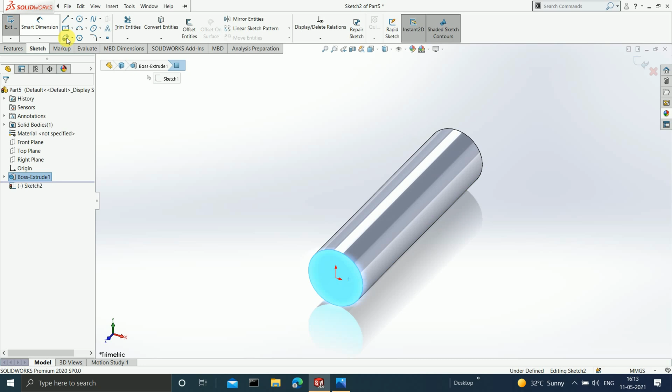Now guys, you have to select this particular plane, go to sketch and click on sketch. Press Ctrl 8 so that it becomes normal to your line of vision. And on this you are again going to sketch a circle, and give the dimension to the circle as 25 mm. This circle that we are going to extrude is for the ball bearings. Now click on OK. End your sketch.

Select the sketch, go to features and then click on extrude boss base. And you have to extrude this up to 7 mm. So enter 7 and then you can end your feature.

Now after this, again click on this, press Ctrl 8 and now we have to click on sketch and sketch a circle with a diameter of 30 mm. End your sketch, select the sketch, go to features and extrude it up to 3 mm. This you are going to make use as a stopper for the ball bearings.

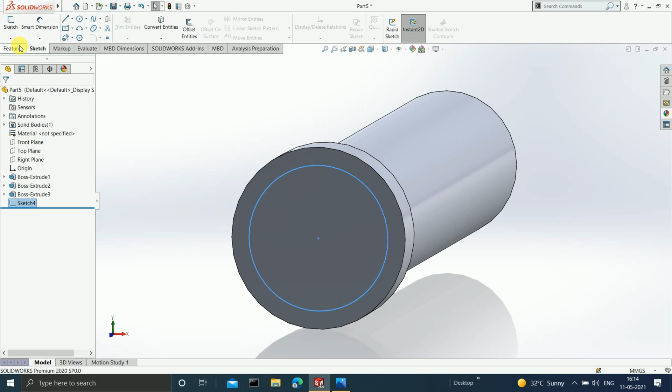Okay, now after this is done, select this, press Ctrl 8, go to sketch, click on sketch and sketch again a circle of 24 mm diameter. Do the dimension as 24 mm and you have to extrude it up to 29 mm. So select the sketch, go to features and click on extrude boss base and extrude it up to 29 mm. This is going to act as a clearance.

Select this again, press Ctrl 8, go to sketch, click on sketch and then draw a circle again on this. Here you have to draw a circle whose diameter is 28 mm. Once this is done, end your sketch. Then select the sketch, go to features, extrude it and extrude it up to 22 mm now. Click on OK. See, can you see your shaft is now getting ready.

Select this, press Ctrl 8. Now after this, click on sketch, again draw a circle and here you are going to draw a circle of 24 mm and extrude it up to 5 mm. Go to features, click on extrude boss base, enter 5 here and this again that you are extruding is for the clearance. This is for gear and this is for clearance.

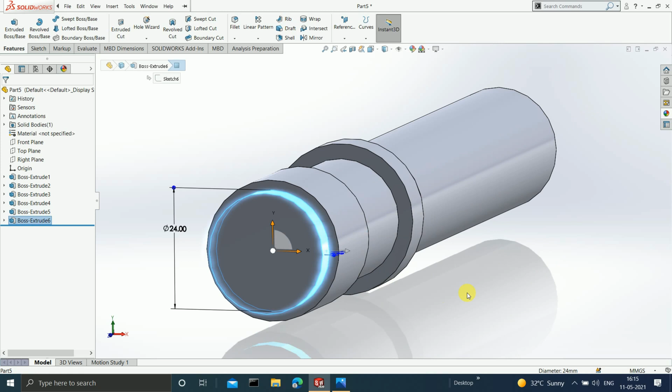Okay, now again select on this, go to sketch, click on sketch, press Ctrl 8 and here you are now going to sketch a circle of 30 mm diameter. And you have to simply extrude it up to 3 mm. Again this is going to act like a stopper for the bearing.

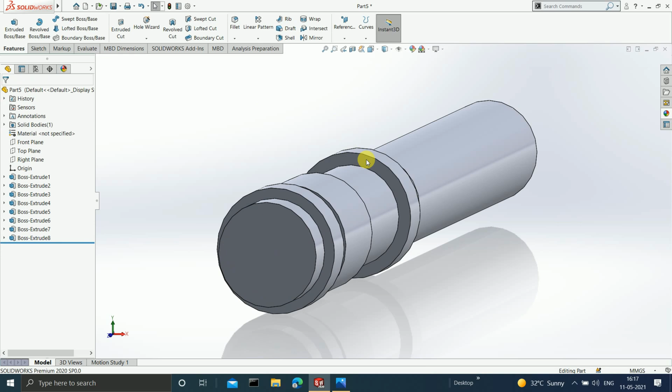Okay, now once this is done, now finally you have to sketch a last circle whose diameter is going to be 25 mm. Hit enter, then end your sketch and just select this sketch, go to features and then extrude it up to 7 mm. Now after this thing is done, then click on OK. So as you can see, your input shaft is now ready.

So you have to save this. I'll press Ctrl S, and in the desktop I have already created one folder for it and I'm going to save it by the name input shaft. Okay, and I'm going to save it. Now after my part is done, then I will close this.

Now we are going to design this input pinion, which you can see. Actually the input pinion is connected to the input shaft itself, but here we are going to design it separately, and then we will assemble it together. Now for designing a spur gear, you have two options: either you sketch it and then extrude it, or you have one simple option available, which I will show you now. Go to file, click on new, click on assembly, click on OK.

Okay guys, click cancel, and here in the design library you will find there is a toolbox present. Go to toolbox, then go to ANSI Metric. Here you have to select power transmission. In power transmission, go to gears, select the spur gear and drag it over here.

What you have to do now is just add the specifications here. We want the module to be 2, the number of teeth to be 18, the pressure angle to be 20, and the face width to be 22 mm.

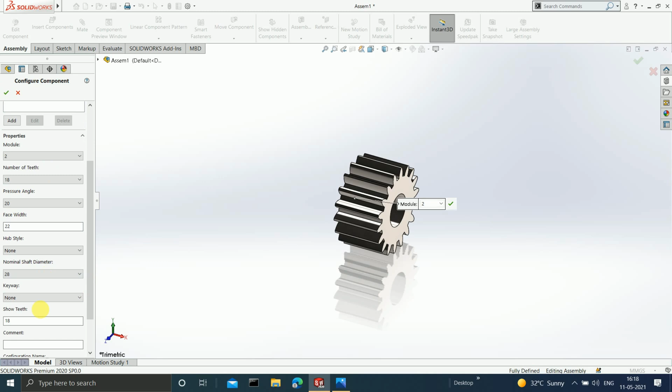There is no hub style required. The nominal shaft diameter should be 28. Once this is done, you can click on OK. You don't want one more, so you will click on cross. And this is how your input pinion is now ready.

After this, you just have to save it. Press Ctrl S, click on rebuild, and save the document. Here you have to save it as input pinion. After this, click on save.

Now once you are done with this, the next thing we are going to do is design this intershaft that is present over here. Actually there is a shaft going through here, you can only see one face of it. See this particular thing, so let's design that.

Let's close this. Go to file, click on new, then click on part, then click on OK. So now we are going to do fast. Click on front plane, click on sketch, draw one circle, do the dimensions to it as 25.

Then select your sketch, go to features, click on extrude boss base, and here extrude it up to 7 mm, and then click on OK.

Select this, press Ctrl 8, draw one circle of 30 mm. End your sketch. Select this particular sketch, go to features, then click on extrude boss base, extrude it up to 3 mm. Click on OK.

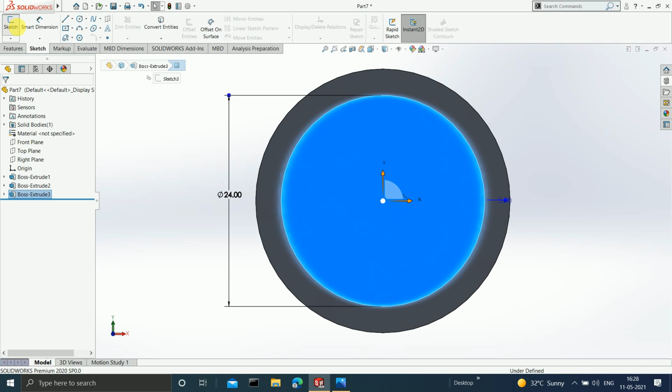Simply select this again, go to sketch, click on sketch, select a circle. Now you have to sketch a circle of 28 mm. End your sketch, select the sketch, go to features, go to extrude boss base, and you have to now extrude it up to 20 mm.

This we are extruding for a gear. See, so your intershaft is now getting ready. After this, you have to select this, press Ctrl 8, and again sketch a circle of 24 mm diameter.

Click on 24. Click on OK, and here you are now going to extrude it up to 5 mm. This is basically for the clearance, which you will understand when we do the assembly.

Select this, press Ctrl 8, and after this, now what you have to do is again click a sketch, and now sketch a circle with 28 mm diameter and extrude it up to 20 mm.

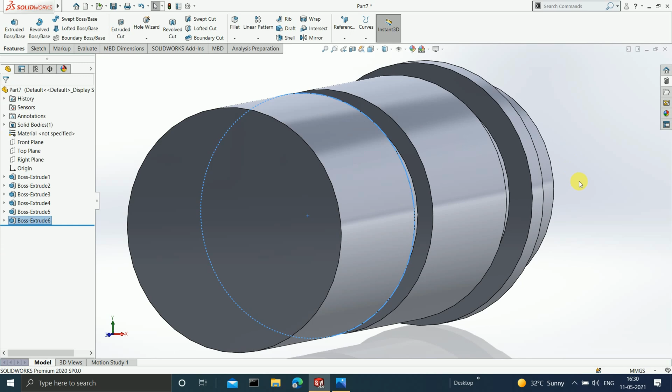Click on OK. Now again select this end surface, go to sketch and sketch a circle. Enter the dimensions here as 24. And sketch a circle, enter the dimensions of this as 24 mm.

Again end your sketch. Select the sketch, go to features, click on extrude boss base and enter the clearance value as 6 mm because you want to extrude up to 6 mm.

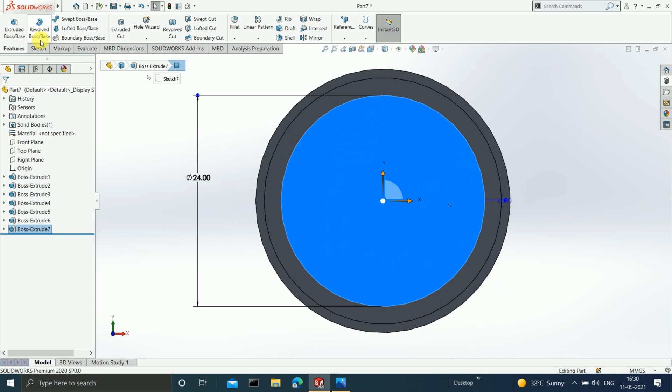Can you see? After this, select this, press Ctrl 8, go to sketch, click on sketch, sketch a circle. Now give the dimensions to the circle as 24 mm. End the sketch. Select the sketch, go to features, click on extrude boss base, and here you have to extrude it up to 3 mm.

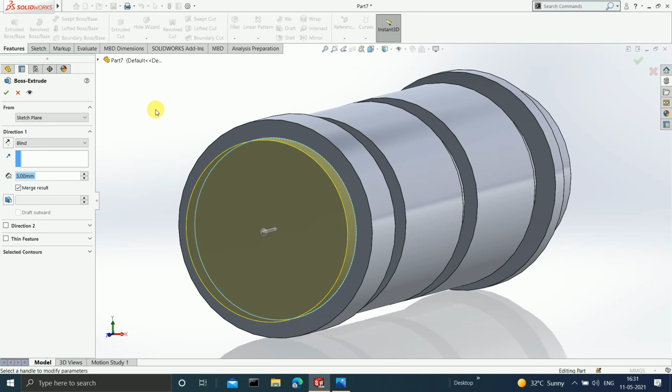After this, select this, press Ctrl 8, click on sketch, and sketch one more last circle of 25 mm diameter, with the smart dimensions as 25 mm, then extrude it up to 7 mm. And then click on OK.

So guys, in this way your intershaft is also now ready. You just have to save it now. Press Ctrl S, and I'm going to save it by the name intershaft.

Okay, now I'll end this sketch. Now the next thing we are going to do is design this particular gear, the golden gear which you can see here. This is what we are going to design now.

I'll go to file, click on new, go to assembly and click on OK. You know the procedure - first click on cancel, go to design library, and drag a spur gear. Once you drag the spur gear, it will ask you for the dimensions.

The module has to be same as the input pinion, so the module has to be 2. The number of teeth here I want is 49. The pressure angle I want is 20. The face width that I want is 20 mm. I don't want any hub style, and the nominal shaft diameter that I want is 28 mm - it's already 28. I'll now click on OK.

So guys, for reducing the weight of this gear, you can have some cuts. This is what we are going to do now. Select this, press Ctrl 8, and on this I am going to sketch.

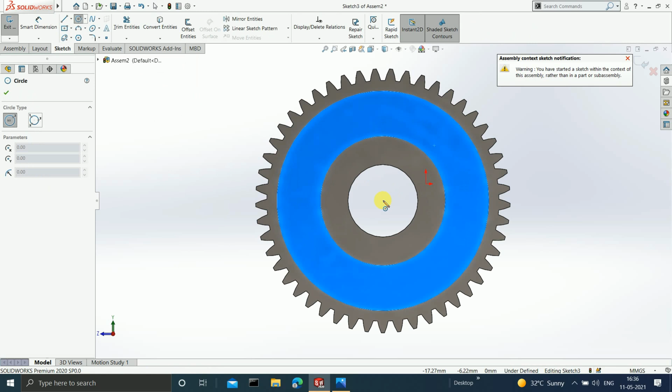After doing this cut on both sides, now we are going to cut holes on this. Click this particular thing, press Ctrl 8, click on sketch, and sketch one circle, click on escape. Select point and mark the center of this. Click on escape. Now make sure that this center and this point should always be vertical, so add the relation vertical here.

After this, give the dimensions to this particular circle as 14 mm, and its distance from the center as 25 plus 8.75, then click on OK.

Now after this, you have to select circular sketch pattern. It is asking us to select the parameters. Make sure that you deselect this, delete it, and select this as the point. Now it is asking how many instances - I want 10 such circles, so I'll enter 10. I'll click on OK and now exit my sketch.

After this, select your sketch, go to assembly, and you will find extruded cut. We are going to make a cut throughout, so I want through all both, and I'll click on OK. Now my gear 1 is ready. I'll save this, press Ctrl S, and save this by the name gear 1. I'll click on save. Now I am done with this, so I'll close it.

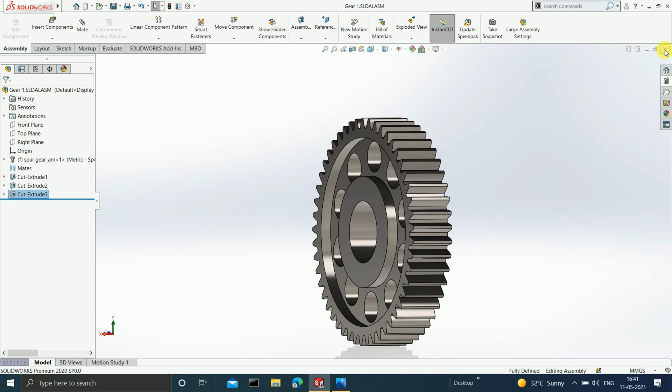The next thing we are going to design is this inter pinion. We have to follow the same procedure again - go to file, click on new, click on assembly, click on OK. Cancel everything, go to design library, and drag the spur gear.

Here you have to enter the data. The module now has to be 2.5. The number of teeth should be 19. The pressure angle has to be 20. The face width here has to be 20 itself. You don't want any hub style. And nominal shaft diameter in this particular case has to be 28. I click on 28 and click on OK.

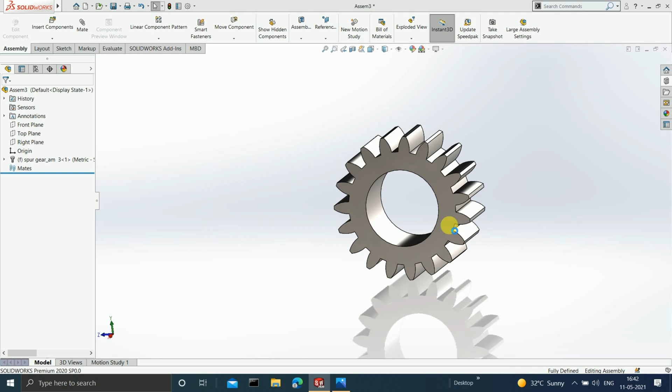I don't want one more, so I'll close this, and now I'm going to save this. Press Ctrl S, rebuild and save the document, and I'm going to save it by the name inter pinion. After this is done, click on save. Just close this.

Now guys, we are going to design this particular output shaft which is present over here. We don't want a shaft with tripod joint - here you can see there is a tripod joint present, but we don't want a tripod joint. It depends upon you which particular joint you want. Therefore we are going to design a shaft which is normal and not hollow. This is the output shaft that we are going to design now.

For designing the output shaft, I'll click on file, go to new, click on part, and click on OK. After this, I'll click on front plane, go to sketch, click on sketch, and draw one more circle with diameter of 65 mm, then extrude it up to 21 mm.

Now after this, select this, press Ctrl 8, sketch one more circle, and here the diameter should be 70, and you have to extrude it up to 3 mm.

Select the sketch, go to features and click on extrude, and extrude it up to 3 mm.

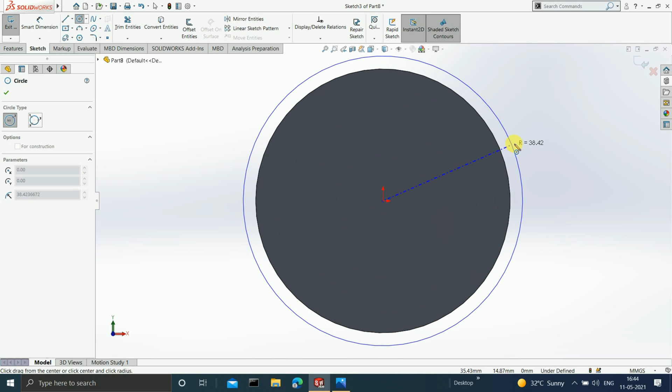Next select this, press Ctrl 8, and sketch one more circle, and this time its diameter has to be again 65. Select the sketch, go to features, and extrude it up to 31 mm.

After this is done, select this particular plane, press Ctrl 8, go to sketch, and draw one circle of 69 mm. Then extrude it up to 18 mm. Select this particular sketch, go to features, go to extrude boss base, and select it up to 18 mm.

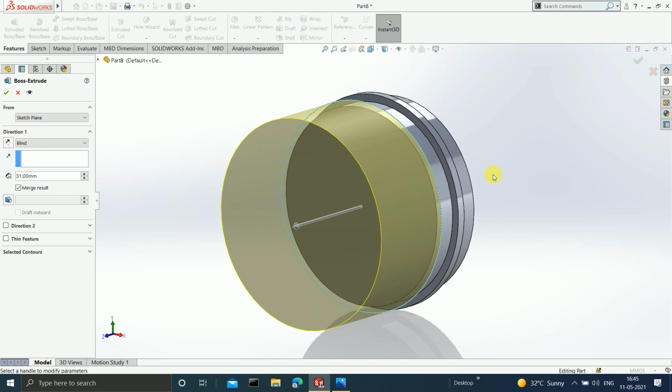Click on OK. After this, select this, again press Ctrl 8, click on sketch, and sketch a circle with a diameter of 65. Select your sketch, go to features, extrude this up to 5 mm.

Again select this, press Ctrl 8, sketch a circle of 70 mm diameter, and then extrude it up to 3 mm. Click on OK, select this, press Ctrl 8 and draw one circle of 65 mm diameter.

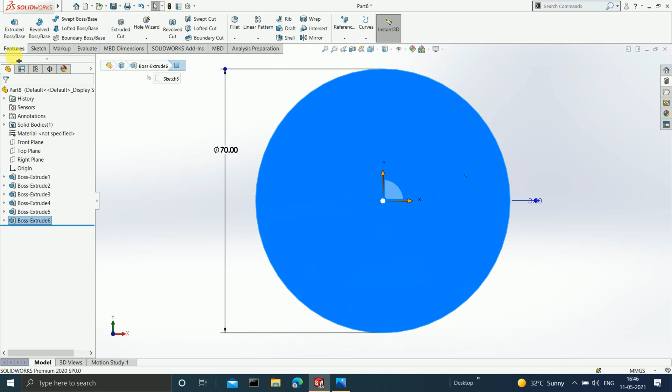Simply extrude it up to 23 mm. Select this particular sketch, go to the extrude boss base and enter the value as 23 here. After this is done, your output shaft is also ready. Just press Ctrl S and save this by the name output shaft. Once it's done, just click on save.

Now, just close this, and now we are going to design this particular gear, which is called the output gear. I'll click on file, click on new, click on assembly, and then click on OK. Cancel everything, go to design library, and just drag one spur gear.

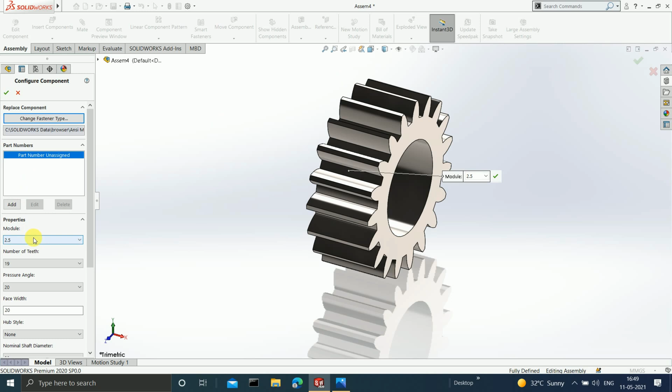Here it is going to ask you for some specifications. Enter the number of teeth as 49. The module has to be 2.5. The pressure angle has to be 20, and the face width has to be 18. Here the nominal shaft diameter has to be 69.

Currently it is not there, so we'll select 65. Click on OK. But we want a cut of 69 mm diameter, so I'll select this particular thing, press Ctrl 8, click on sketch, and sketch one circle of 69 mm diameter, properly from the center. Enter 69 here.

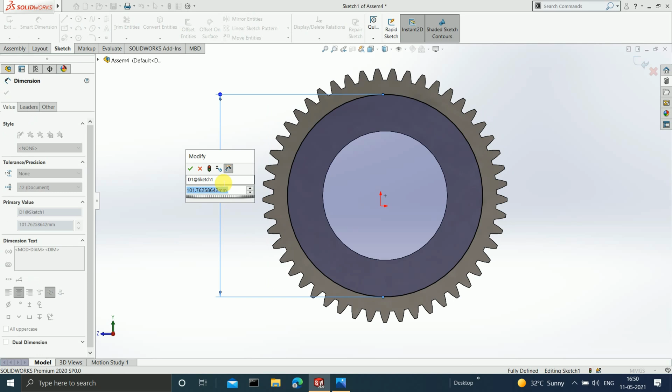After this is done, select the sketch, go to assembly. Here you will find an extruded cut, and we want through all both. Now again, to reduce the weight, it's upon you whether you want to cut it or not, but here we are going to obviously cut it.

Select this, press Ctrl 8, and I'm going to sketch on it. I'm going to sketch one circle first, the same procedure that we did for the earlier gear, then one more circle. Do the dimensions to this as 80, and do the dimensions to this outer circle as 107.

Then just end your sketch, select the sketch, go to assembly. Here you will find extruded cut. Extrude up to 3 mm, and then click on OK. So do the similar thing on this side as well.

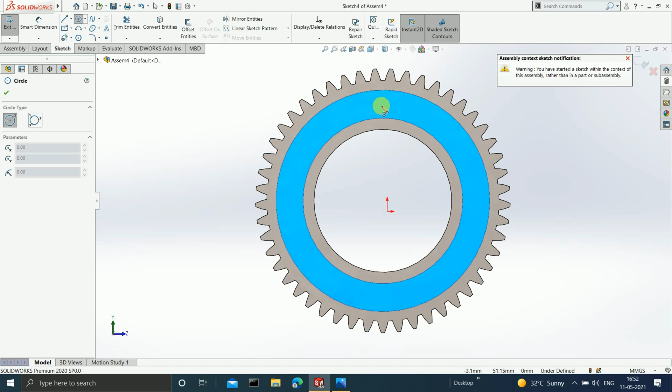Now after you are done on both sides, you have to cut some holes here. Select this, press Ctrl 8, click on sketch, sketch one circle, click on escape, select the point, mark it on the center, click on escape, select this particular point and click on vertical. After this, give the smart dimensions to the circle.

It has to be 10 mm, and its distance from the center 36.75. Now click on escape.

Go to circular pattern, select this thing, first delete this point and select the center as your point. Now you have to enter the instances over here. We want 20 such instances, and then click on OK.

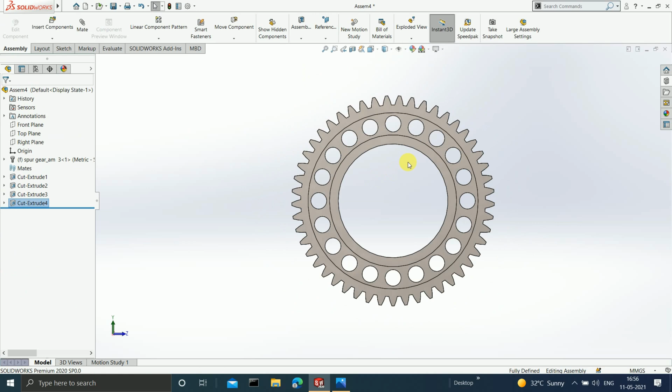Now simply end your sketch. After this, select the sketch, go to assembly. Here you will find extruded cut, and extrude, through all both. Click on OK. Now after this, your gear is ready.

Press Ctrl S, and here we are going to save it by the name output gear. Now after this is done, just click on save.

Now guys comes the most important part of designing the casing. I have some dimensions with me for this. So I click on file, click on new, click on part, and then click on OK.

First of all I'm going to click on front plane, and click on sketch. I'm going to sketch one circle here, and its diameter has to be 115.

Now draw one center line over here. It has to be horizontal. Click on escape. Draw one more center line. Click on escape, select this line, make it for infinite length and for construction.

After this, make sure that this is always coinciding with the origin. So select both of them and add an additional coincident. Now click on smart dimensions, select this, and enter the value as 50 here.

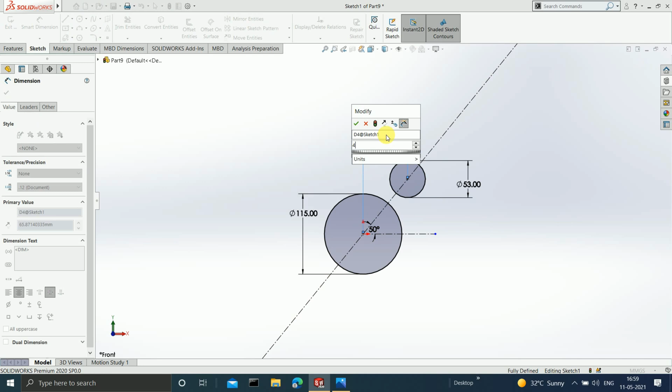Now just draw one more circle. Click on escape. Make sure that this point and this particular center both are horizontal. Now give the dimensions to this, and the diameter should be 53.

And the distance between the centers has to be 85 mm. Now just select the trim entities option, trim the inside part which is present here, and after you are done, click on OK.

Now guys, you obviously have to apply some fillets over here, so I'll select sketch fillet. In the items to fillet, I'm going to select this point, this point, this particular point, and this point, and enter the value as 15 here. After this is done, click on OK.

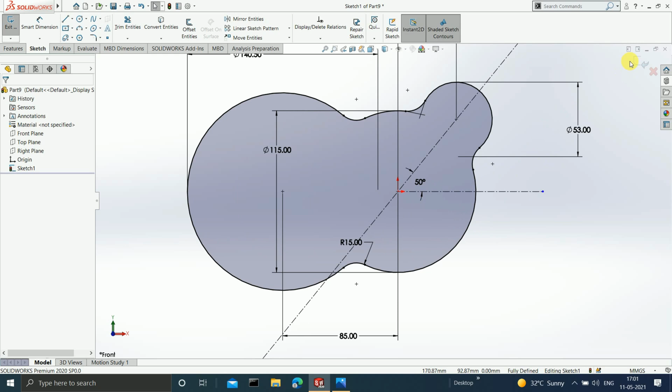Now the next job is to simply extrude it up to 35 mm. So I'll end my sketch, select the sketch, go to features, and extrude it up to 35 mm. After this is done, click on OK.

Now the next thing you have to do is apply a shell feature. So I'll click on shell feature, and here I'm going to select this particular face, and I want the thickness of 4 mm. So I'll click on OK.

Now once you are done with this, select this particular face, press Ctrl 8, sketch on it. Select the centers of each circle. See, here is the center. Similarly for this bigger circle as well.

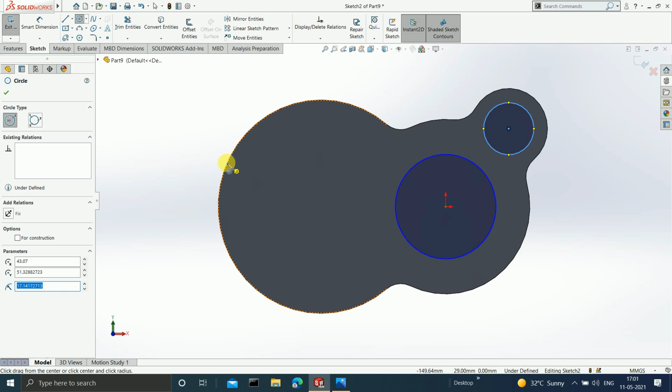And now guys, give the dimensions. Here it should be 37. Here also it should be 37 mm. And in this case it has to be 85 mm. After this is done, just end your sketch.

Now select this particular sketch, go to features, click on extruded cut, and extrude through and cut through all.

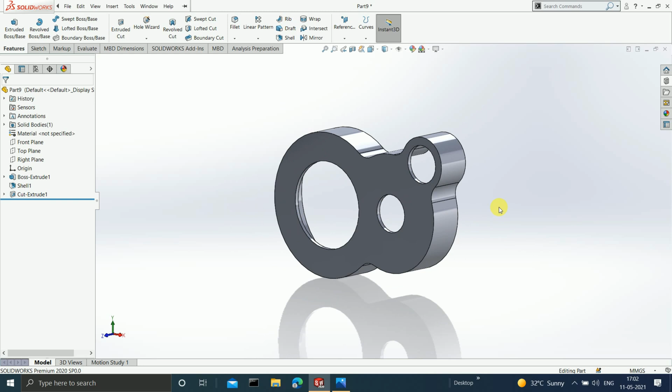Now once you are done with this, again press Ctrl 8, click on sketch. I am going to sketch one circle here, and click on escape. Give the dimensions to this, it obviously has to be 37.

Now click on offset entities, select this particular thing and offset by 2 mm. Once this is done, click on OK, end your sketch. Select the sketch, go to features and click on extruded boss base, and extrude up to 3 mm.

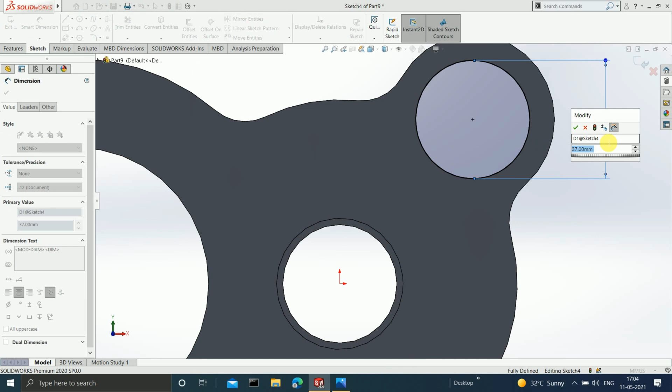Now after this, do the same thing again. Click on escape. Give the dimensions here as 37. Click on offset entities, select this and offset by 2 mm. After you are done with this, click on OK.

Select this particular sketch, go to features, and click on extruded boss base. In this extruded boss base, you have to extrude it up to 3 mm.

Now once this is done, you have to do the same procedure for this particular bigger circle as well. Press Ctrl 8, click on sketch, give the smart dimensions to this, it has to be 85. Just select offset entities, select this particular thing and then click on OK.

Now once you're done with this, end your sketch, then select the sketch, go to features and click on extrude boss base, and extrude it up to 5 mm.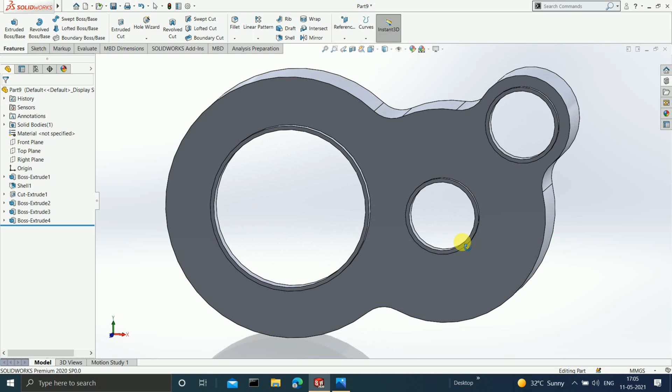Now guys, you have to cover this middle circle, so I'll select this particular face, press Ctrl 8, and sketch on it. I'll end my sketch. I'll select this particular sketch, go to features, click on extrude boss base, and extrude it by just 2 mm.

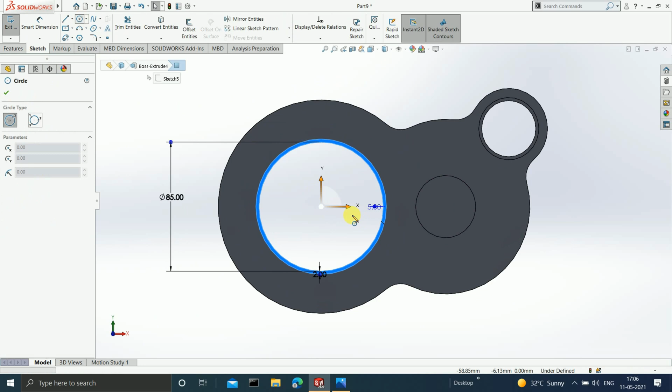After this thing is done, now for this particular output thing, we don't have to cover it completely. So I'll click on sketch, select this origin, draw one more circle from the center, and guys, here you have to give the smart dimensions to this as 66 mm.

Okay, and this has to be 85. Just select this particular sketch, go to features, and then click on extruded boss base. Here I have extruded up to 2 mm, and then I'll click on OK.

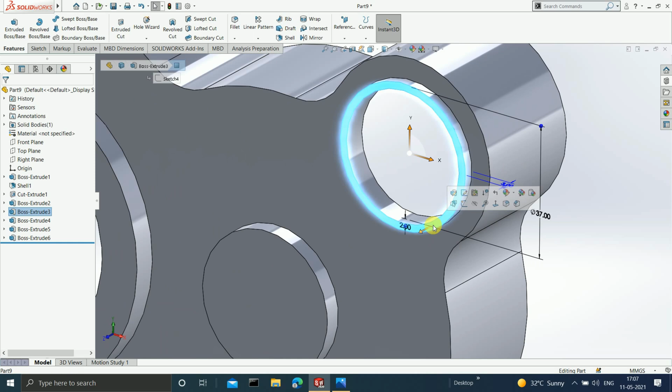Okay, fine with this. Now the next thing that you have to do, press Ctrl 8, click on sketch, and sketch on it. Select the center, click on escape, draw one more circle, and the dimensions of this should be 26 mm.

And the bigger circle has to be automatically default. I'll end the sketch, select the sketch here, go to features, and I'm going to click on extruded boss base. Here I'm going to extrude to 2 mm and then click on OK.

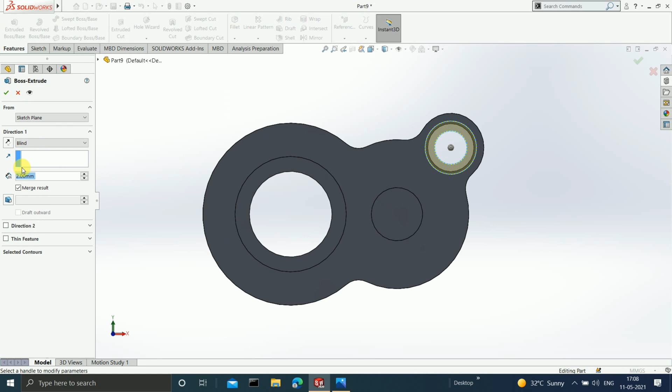So guys, our casing is almost ready over here. If you want, you can obviously apply some fillets, but before that we have to do one more thing over here. Press Ctrl 8 and then click on sketch.

Now click on offset entities and you have to offset it by 5 mm. Click on OK. Now guys, click on offset entities again, select this particular sketch.

Select the whole outside edge over here. Enter 5 here, and now this time you have to click on reverse, and then click on OK. Now just end your sketch.

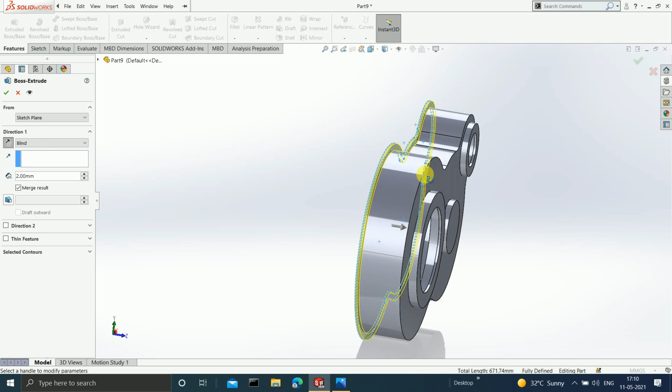Select this particular sketch, go to features, and you are now going to click on extrude boss base. Change the direction from here, and you can obviously enter the value as 3 mm. After this thing is done, just simply click on OK.

So guys, your casing is almost ready now. If you want, you can obviously apply some fillets over here. So how to apply the fillets, that you must be knowing. You just have to simply go to fillets and select the edge.

For example, I am selecting this particular edge here, and see, a fillet is getting applied. You have to enter the value, for example 3 mm, and then your fillet will automatically get applied. Can you see? Similarly, you can apply wherever you want.

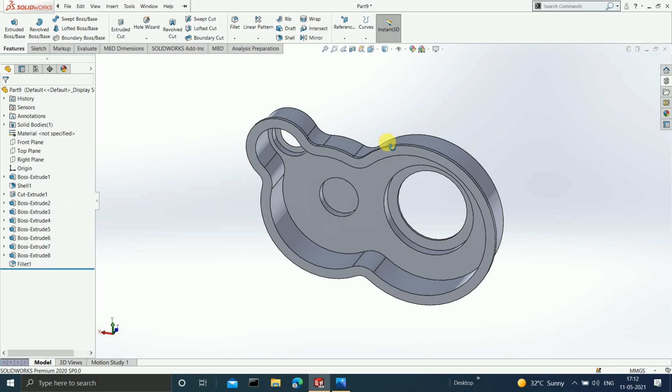So guys, as you can observe over here, I have applied some fillets over here. Now the next thing that you have to do, you have to obviously do something to the joint.

So we have to do this particular sketch over here now. First of all, we have to draw a vertical line. Click on escape, select this particular line, click on infinite length, and then click on OK. After this is done, select this particular line and make it fix.

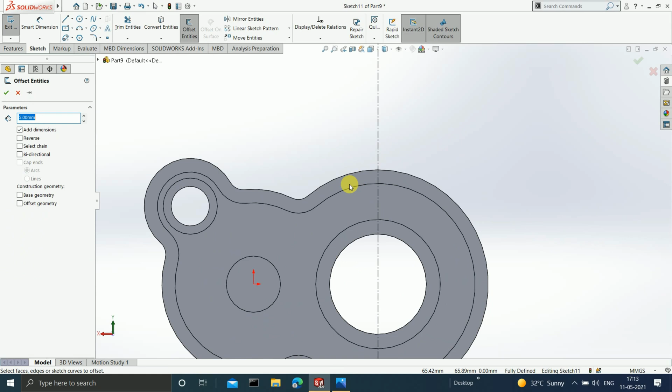Now the next job that you have to do, just refer to the figure. You have to click on offset entities, select this particular thing, and offset by 0 mm. You could have done this using convert entities as well, no issue.

Now here you can see that there are two vertical lines which are 4 mm apart on both sides of the center line. So let's draw that. Click on escape.

So now guys, give the dimensions to this. From this particular thing to here, it has to be 4 mm. From here, again it has to be 4 mm.

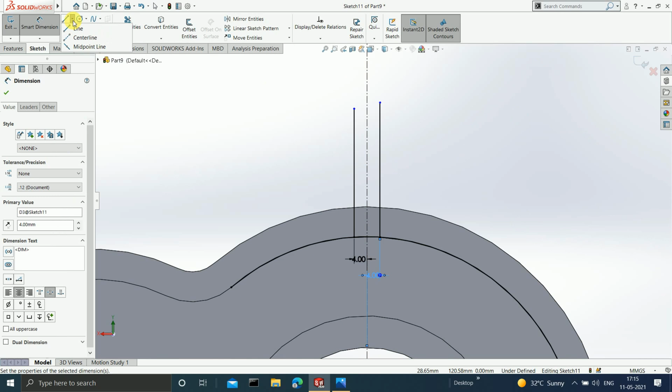The next thing that is done over here, we have drawn one tangent, horizontal tangent over here. So let's draw that horizontal tangent as well. Click on escape. Select this, select the circle, and make it tangent.

Okay, now give the smart dimensions from this particular point till here, and it has to be 3 mm. Again from here, it has to be 3 mm.

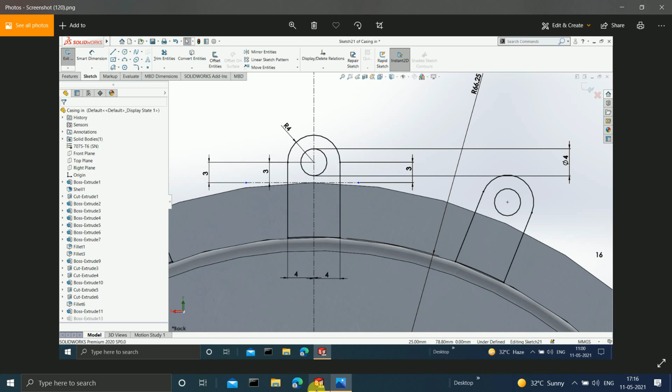Now the next thing that you have to do is just to simply draw a 3-point arc. Click on escape. After this, on the same point, draw one circle of radius 4 mm. So I have drawn one circle of diameter 4 mm as well.

Now after this, select trim entities, trim this unwanted part, and then click on OK.

Now you want the same thing on this particular circle, so I'll obviously click on circular sketch pattern, and here it is asking me to select the parameters, so I'm selecting this. Instead of this particular point, I'll delete this point. I want it from here. And you have to adjust the number of instances, obviously.

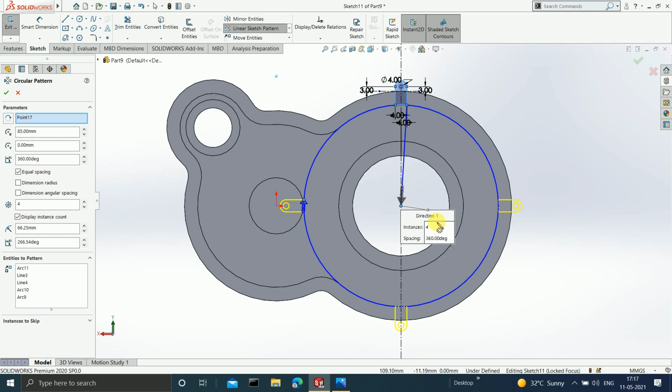Enter the number of instances as 20 here. And we obviously have to skip these particular instances, so I'll click on instances to skip. I'm going to select this particular instance, this one. Okay, and now it is fine, so I'll click on OK.

Now I will end the sketch. Select the sketch, go to features, click on extrude boss base. Extrude in the opposite direction and extrude up to, let's say, 5 mm.

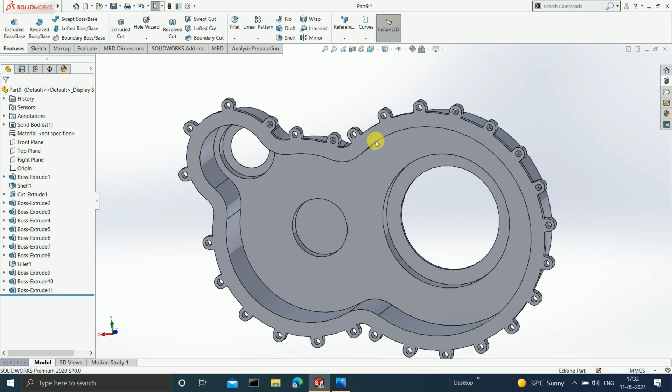Click on OK. You want to do the same thing over here as well, which you can do easily. In this way, I've done this on the complete edge, and now the casing is ready. You can apply fillets if you want, and even apply a rib feature to give it support. I'll save this casing by pressing Ctrl+S, save it by the name casing, and click save.

Now it's the important time for us to assemble all the things that we have done. I'll click on file, click on new, click on assembly, then click on OK. Just cancel everything. The first thing we are going to do is assemble this input gear and this golden gear that you can see.

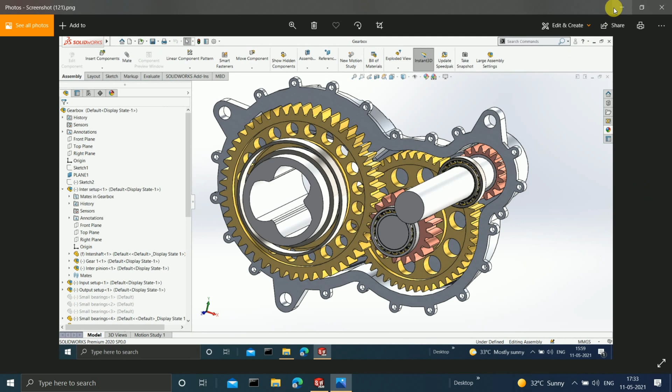Select the front plane, press Ctrl+8, click on sketch, sketch one circle, click escape, give the dimension as 49 into 2. After this, sketch one horizontal center line, click escape, sketch one center line at an angle of 50 degrees, click escape, select this, make it infinite length.

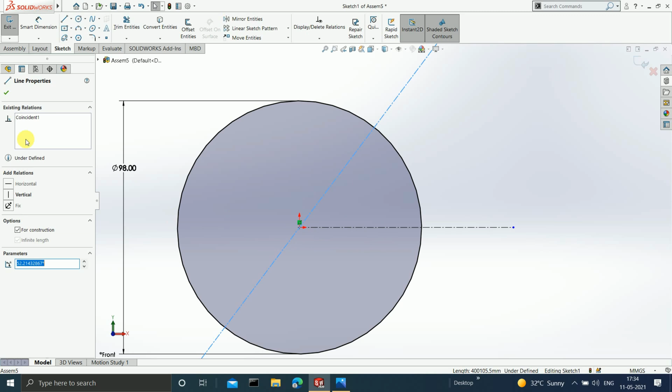Now make sure that this is always coinciding. Give the smart dimension as 50 degrees. After this, click one more circle, click smart dimension, give the dimension as 36, click escape. Now the distance between these two has to be 43.07. Now you can end your sketch.

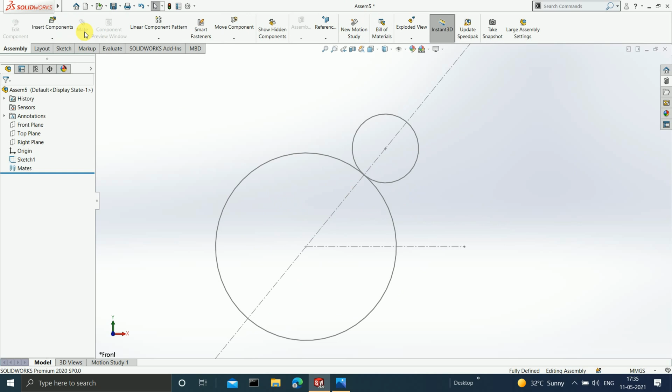Now you have to insert the components, so I am going to insert the input gear. Rebuild the document. Right click on it and make it float.

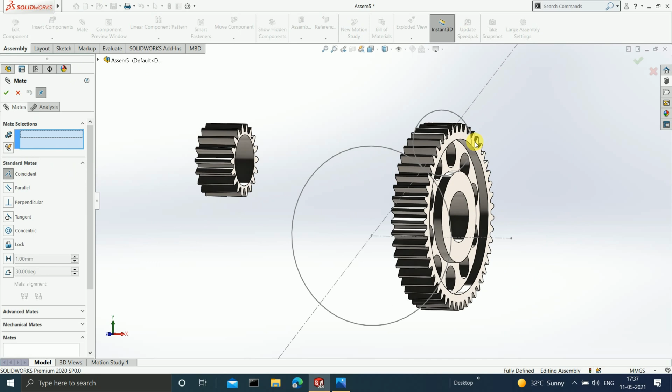Now you have to insert one more thing. Click on insert components, insert gear 1. Now after this is done, make sure you apply a coincident mate between this particular face of gear 1 and the front plane. This is fine, then click OK.

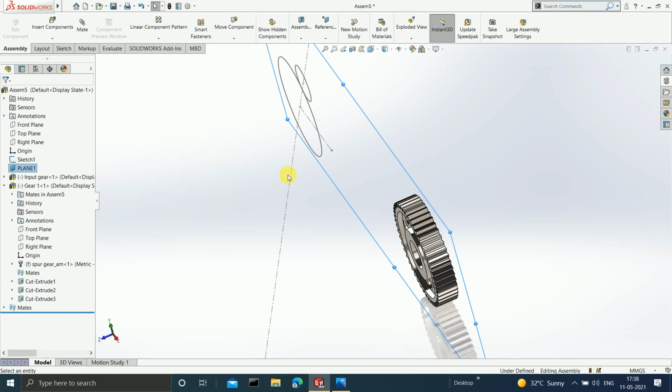Now you have to insert one more plane. Insert reference geometry, click on plane, and this plane has to be at a distance of 1mm from the front plane. Reverse the direction and click OK. Now once you've inserted this plane, the next thing is to apply a mate between this face of the gear and plane 1. Change the mate orientation or alignment and click OK.

Now you want this circle and this circle to be concentric, so I'll click on concentric, select this and select this particular thing, click OK. Now you want this edge and this circle to be concentric, so I'll click OK. After this is done, I'll click OK. Now can you see that the gears are properly meshing with each other?

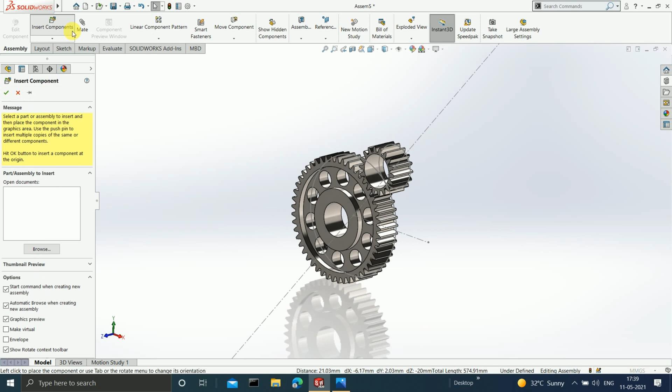Now you have to add the input shaft. So I'll insert components, and I'm going to insert the input shaft.

I will select this plane and select this, and you can see it has now gone into its place. Now the next thing you have to do, I want this plane to coincide with this one. I click OK, and now you can see the shaft has taken its position properly. Just simply click OK, and now it's time for us to insert the inter shaft as well.

I'll click insert components, and here I'm going to click on inter shaft. I'll click open.

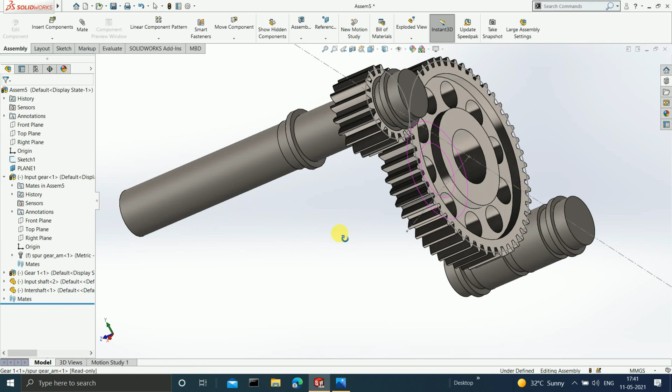Now the next thing you have to do is apply a mate between this particular surface and this surface. Can you see a concentric mate has been applied? Now once this is done, you want this particular face to coincide with this, so I'll select this, and a coincident mate is applied. So it is as easy as that. I hope it is easy.

Now here there will be one more gear at this particular position, so I have to insert components now. I'll click on insert components, and I'm going to insert the inter pinion. Click rebuild. Make sure that it is float. Yeah, it is float.

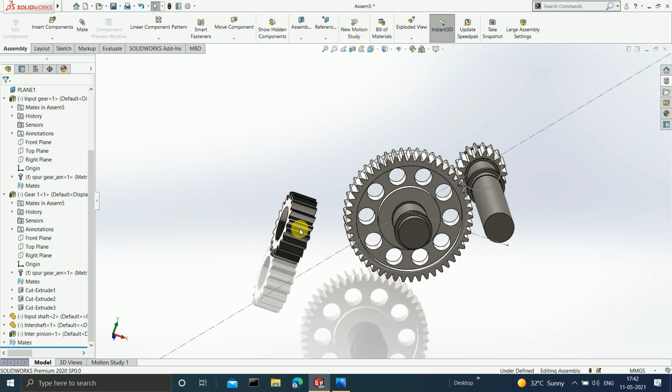Now obviously you want this particular surface to be concentric with this one, so I'll click on mate. I'll select this surface and this surface and make them concentric. Now make sure that this surface of the gear is always coincident with this particular surface. Click OK.

Now after this is done, let us apply the mesh. Let us mesh this particular pinion with the output gear. So for that, I am going to click on this and press Ctrl 8.

I am going to sketch on it. I'll sketch one circle, click on escape. Make sure that this is always horizontal with the origin. Now give the dimensions to this as 49 into 2.5, because 49 is the number of teeth and 2.5 is the module. After this is done, click on escape.

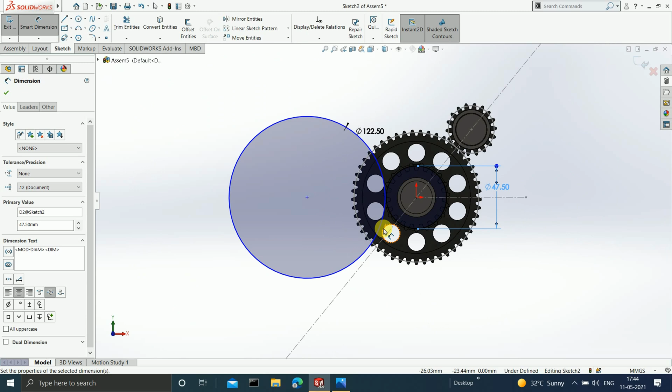Now draw one more circle, click on escape, enter the dimensions of this as 19 into 2.5. Now click on escape and make sure that both the circles are tangential. Select both the circles and make them tangent, and click OK. Now you can end your sketch, and now you have to insert one more plane.

Assembly, go to reference, insert, go to reference geometry, go to plane, and here you have to insert the first reference as this particular face and enter distance as 1 mm, and you want it on the opposite direction. So I'll click on flip offset and click OK.

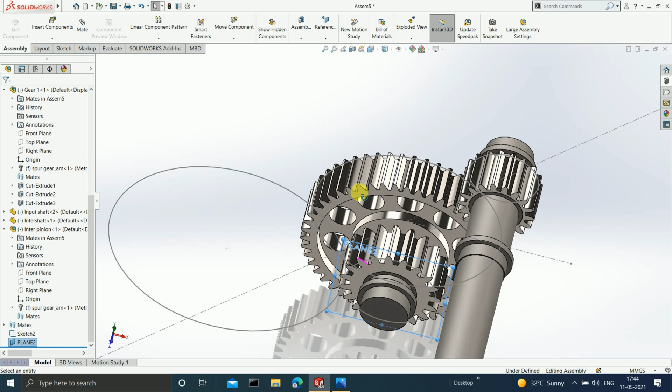Now once this plane is ready, we have to insert the output gear. Here you can find the output gear, I'll click on open. Now once this is done, click on mate. You have to apply a mate between this particular plane face and plane 2. Click on mate alignment and then click OK.

Now make sure that this particular circle is always concentric with this one. Now you can observe that the gears are properly meshing with each other. Now it is going to be very simple for us.

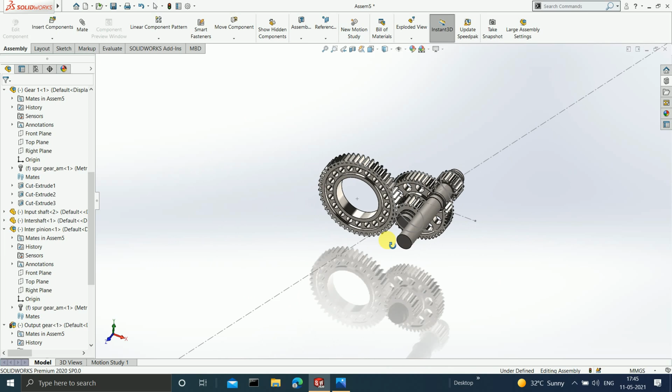You just have to insert the output shaft now. So I'll insert the output shaft. Here is my output shaft. Now what you have to do next is that you want your gear to fit exactly on this particular surface. So I click on mate, I'll select this and I'll select this, and then click OK.

Now once this is done, you can click OK, and your assembly is almost ready. The important difficult part is done. Now you just have to insert the ball bearings.

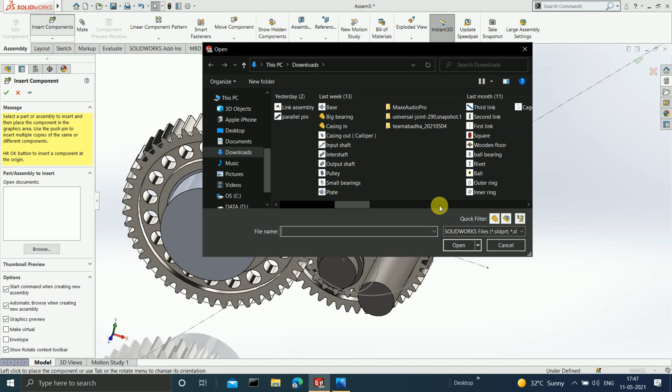I'll click on insert components, and here you can find out the ball bearing present. So I'll click on open. You might be thinking that I have not shown how I did the ball bearing. Let me tell you that I have already uploaded a video on how to make a ball bearing, as it is itself an assembly, so you can find the link of that video in the description box below, or you can simply click on the I button present on the right top corner of your screen.

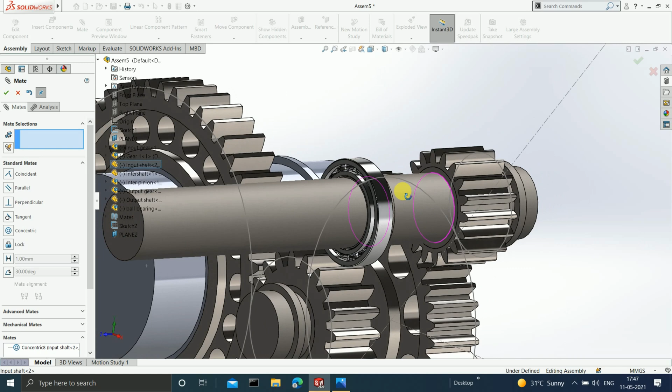Now once this is done, you want this bearing to fit over here. So I'll click on mate, I'll select this particular surface, I'll select this, and a concentric mate is now applied. Now after this, you have to apply a coincident mate between this particular surface and this surface, and then click OK.

Similarly, you have to insert one ball bearing over here as well. So I'll insert components, and I'm going to insert the ball bearing. The same procedure you have to follow. As you can see, I properly fit the ball bearing and applied the mates over here. You have to insert the ball bearings at this particular position and at this position as well, so let's do that.

Now you can see I have inserted the ball bearing at this particular position. One over here and one here. Now you want some big ball bearings on these particular positions as well, so let us insert the different ball bearings now.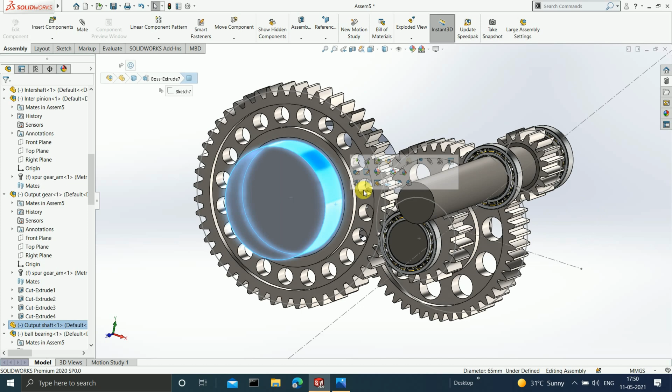So I have entered a big bearing. I have not done a detailing of this particular bearing, but you can obviously pause the video and do detailing for this particular bearing as well. Apply the mates over here and then click OK.

Now apply a mate in which you have to make this particular face and this face coincident, and then click OK. Similarly, apply one bearing on this particular side as well. So insert components, the big bearings.

So guys, now the assembly is ready. Now it is time for us to insert the casing. That is going to be very easy. I'll insert component. Here you can find the casing present. Open it.

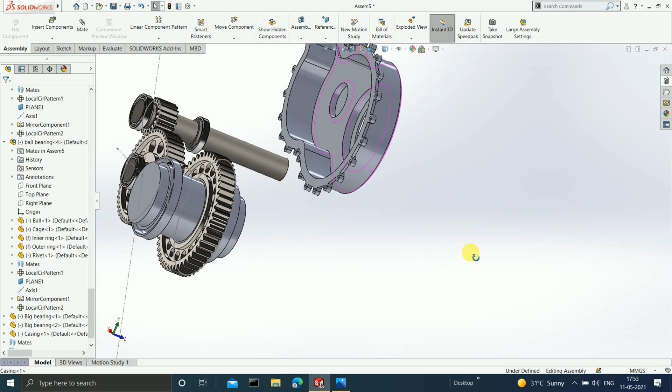Now guys, make sure that this particular plane is coinciding with this particular plane, and then click on OK. Now you want this particular edge to be concentric with this one. So concentric mate is applied. Click on OK.

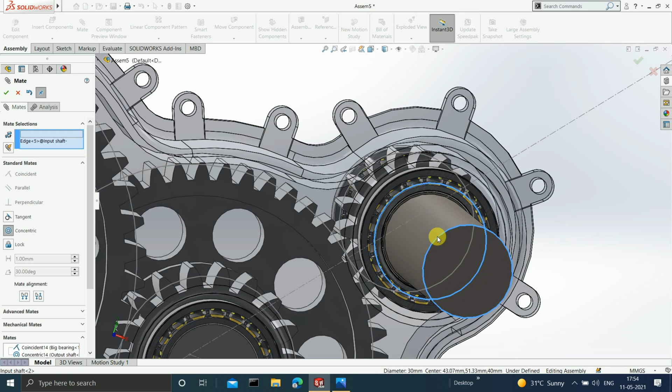If you want, you can even apply one more concentric mate between this and this, so that now it is going to remain fixed. Now I'll click on OK.

And guys, you want a casing on the other side as well, so it is now simple. What you can do here is click on mirror components. In this, you have to select the mirror plane as this particular plane, and the components to mirror is obviously this particular casing itself, and then click on OK.

And then click on OK, and see a casing has appeared over here.

And as your gearbox is now ready, now it is upon you whether you want to apply some different looks for it. If you want, then you can do it.

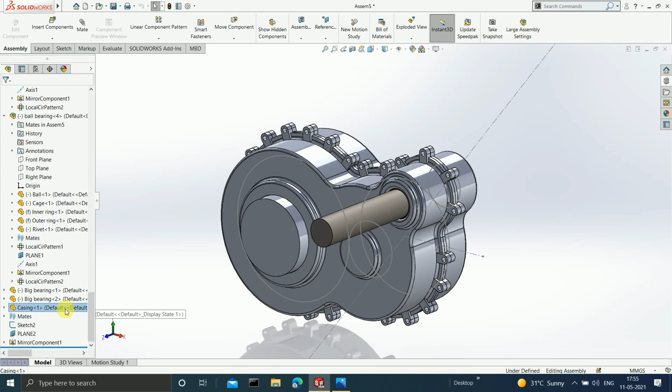If you want to observe what's inside, then you can select this particular casing - this is casing number 1 - and right click on it, and you can hide the component. Okay, and you can observe what's inside.

So guys, now let us impart some aesthetic look to the gearbox. For this, I am going to select the shafts. I am going to select the input shaft, press Ctrl, select the inter shaft, and I am also going to select the output shaft.

Okay, and selecting all these three, now I am going to click on this edit appearance. Here I am going to click on appearances, click on painted, click on car, and I am going to select metallic cool grey.

Now after this, I am going to select this particular gear, that is nothing but our input pinion. I have selected the input gear, and now we are going to go to edit appearance. In this, go to metal, go to copper, and I'm going to select brushed copper. And similarly I'm going to select for this particular pinion as well.

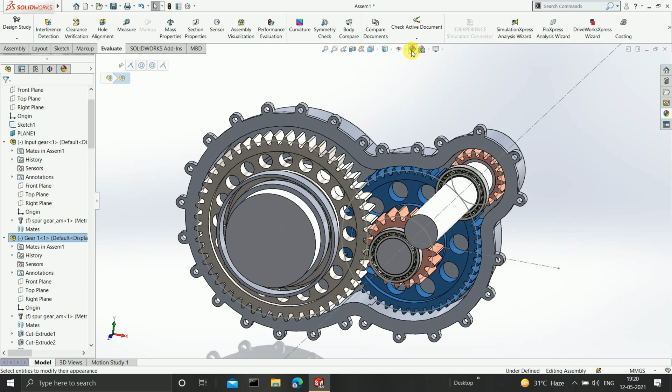Then now I'm going to select this particular gear, that is nothing but gear 1. I'm selecting this, and I'm going to go on edit appearance. Here I'm going to select brass. It's upon you which color you want. Since I feel this combination is better, therefore I am selecting it. It depends completely upon you. Okay, so this is done.

Now it's time for the casing. So you can obviously select the casing. I'm selecting the mirror component. I've selected the casing, and now I can edit its appearance as well. I'll go to aluminium. Here I'm going to select brushed aluminium. Fine, and now I'll click on OK.

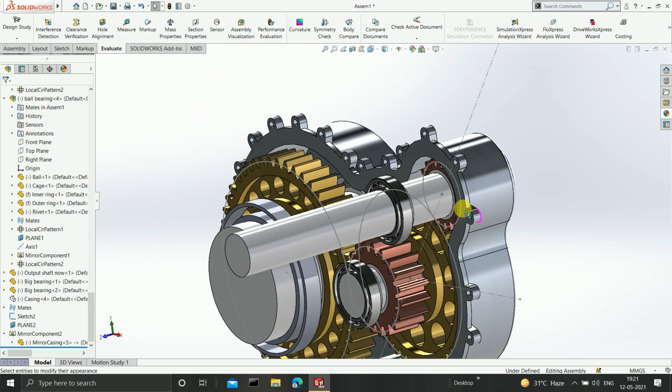So guys, now after this thing is done, it is time for us to apply the mechanical gear mates between the gears. So for that I'm going to go on assembly, go to mates. Here you will find mechanical mates. In this, go to gear, and you have to first select the circular edge of the gears.

So I'll select this particular circular edge of gear 1, and since it is meshing with this particular gear, I have to select the circular edge of that particular gear as well. Be careful, do not select the circular edge of the shaft, so you have to be careful during this selection.

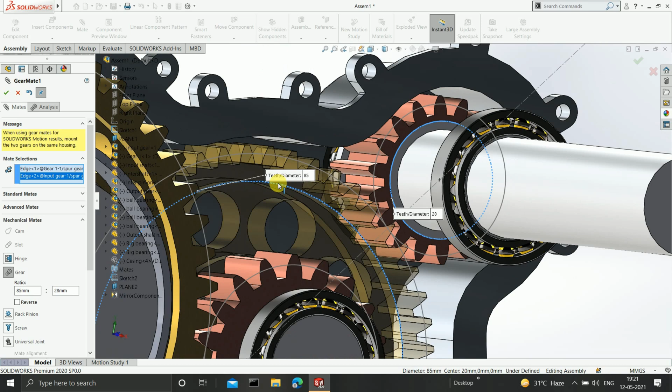Okay, so once you have selected this, now what you have to do is simply insert the ratio. First you had selected this particular gear, so the number of teeth on this gear is 49 and the number of teeth on the pinion is 18. So I'll enter 49 is to 18. Clear? And then click on OK.

Click on OK, and now guys, you can observe that if we move this, automatically once you move the pinion, gear 1 is also moving with respect to that. Here you can observe that the other is not moving with respect to the one because we have not applied the gear mate. So first adjust the gears properly, and now you can apply the gear mate.

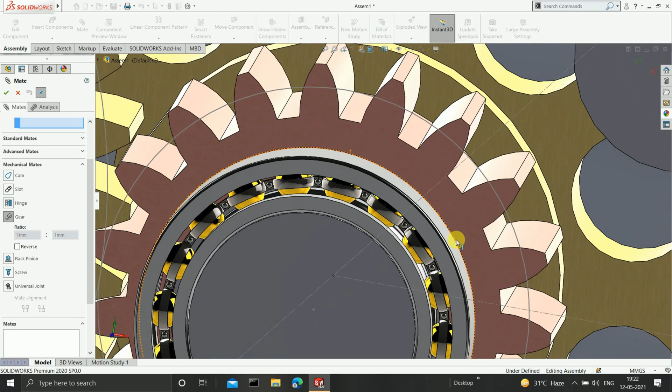Go to mate. In this, first deselect this, go to mechanical mates, select the gear, select again the circular edge - properly select the circular edge, otherwise you will select the circular edge of the shaft. So you have to precisely select in this manner. Okay, and then select the circular edge of the output gear.

Now since first you had selected this particular gear, the number of teeth on this gear is 19 and the number of teeth on this output gear is 49. After this is done, then I'll click on OK. And now guys, you can observe that once we move the one, the other is also going to move with respect to that.